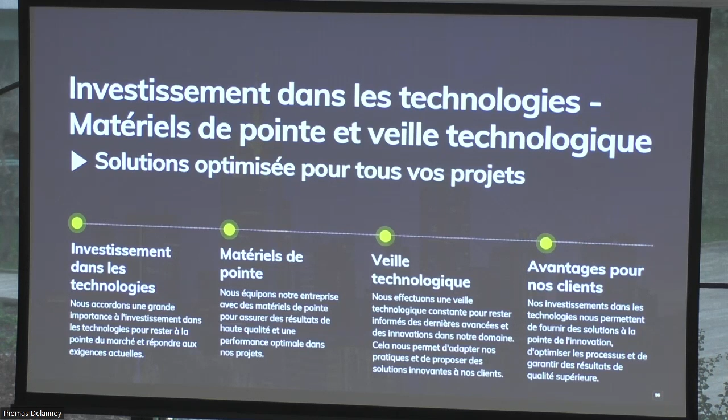Un point très essentiel de notre startup, c'est surtout l'investissement dans les nouvelles technologies. On sait qu'aujourd'hui le monde évolue, on a cette transition au numérique, cette transition au digital, et on a souvent des challenges pour travailler dans ce secteur. Ces challenges peuvent être de la résistance, des gens qui résistent au changement, ou parfois tout simplement le manque de compétences ou le manque de formation. Donc le but c'est vraiment d'avoir un matériel de pointe, des ressources et des compétences clés pour pouvoir résoudre les problématiques de notre marché actuel et surtout de se conformer à la veille technologique pour donner des solutions optimisées pour nos clients.

Alors l'industrie 4.0, ça ne se cache pas, aujourd'hui on y est, que ce soit avec l'automatisation ou la connectivité. On essaie plus ou moins d'automatiser les tâches pour gagner du temps, gagner en service et pouvoir partager nos données sur un cloud commun. Avec l'avancement technologique et l'apparition des IoT, Big Data, on va pouvoir gérer une quantité massive de données, sous plusieurs formes, pas seulement des données de construction mais aussi des modèles d'information variés. Et le problème aujourd'hui, c'est de pouvoir gérer toutes ces données et donner une intégration complète dans nos systèmes.

Quel est l'apport du géospatial dans tout ça? Le géospatial, c'est un mot qui est issu de la technologie de géomatique. C'est un mot grec, géo pour géographie, matique pour l'informatique. Alors notre travail repose principalement sur trois éléments essentiels.

Tout d'abord, on a la collecte de données, qui peut être aujourd'hui sous plusieurs formes: soit on choisit un modèle prêt de données à utiliser, soit c'est nous-mêmes qui créons la donnée. Je prends l'exemple en Tunisie, par exemple, contrairement en France. En France, on a toute la donnée, la quasi-totalité de données ouverte via des géoportails communaux. Donc pour travailler sur un projet de construction, on va tout simplement chercher cette donnée dans les géoportails, dans les plans existants, et par la suite faire évoluer notre travail vis-à-vis de ces données-là.

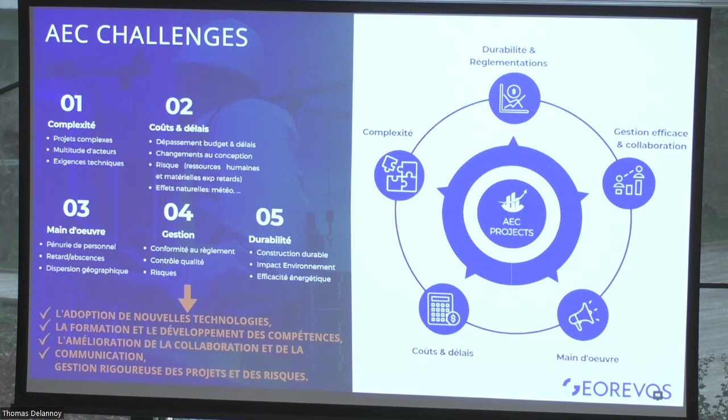Je reviens sur le terme construction 4.0 et l'apport des NTIC et du géospatial. NTIC, c'est les nouvelles technologies d'information et de communication. On entend parler du BIM, de réalité virtuelle, de l'analyse de données et d'intelligence artificielle surtout, de la capture de réalité avec le drone, le laser scan, les capteurs et l'IoT, et surtout de pouvoir faire le monitoring et la surveillance en temps réel de nos chantiers.

Toutes ces technologies, si elles sont bien choisies et bien adoptées dans le projet, vont nous permettre d'optimiser les ressources et surtout de réduire le coût et le temps de réalisation du projet. On va voir par la suite un exemple concret.

Effective management de projet, c'est-à-dire la gestion effective des projets : on va travailler tous ensemble dans le but de réduire les risques de projet, de fournir de meilleurs résultats, de meilleurs outputs, et d'optimiser le temps et le coût du projet.

On va utiliser toute cette palette de technologies, à savoir la réalité augmentée, l'utilisation des systèmes mobiles, parce qu'aujourd'hui le mobile est dans notre quotidien. Qui d'entre nous n'utilise pas son téléphone quasi toute la journée ? Donc nous proposons des solutions aussi simples à utiliser par téléphone portable.

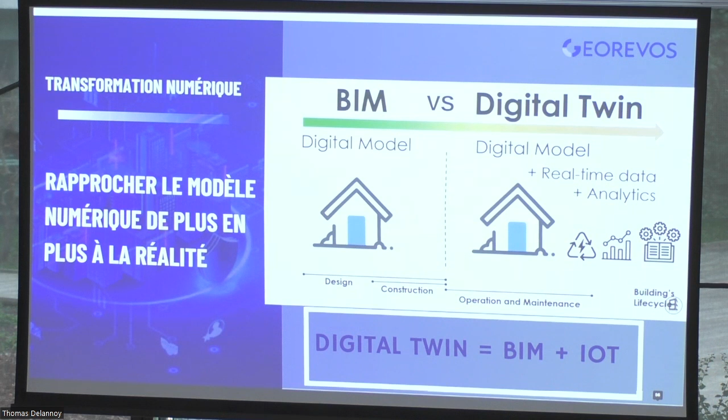Le BIM, ce n'est pas de la 3D, ce n'est pas un outil, ce n'est pas Revit, ce n'est pas ArchiCAD, c'est plutôt tout un process de gestion et de collaboration. On dit souvent que le BIM, c'est 3C : collaboration, communication et coordination. Le but, c'est toujours d'avoir un seul modèle via tous les intervenants, toutes les parties prenantes du projet, pouvoir se connecter tous ensemble, travailler tous ensemble sur le même projet, depuis la première phase qui est la conception jusqu'à sa construction, et par la suite l'exploitation et la maintenance.

Si on compare le CAD au BIM, on va dépenser plus de temps au début dans la conception, c'est-à-dire on va mettre de 50 à 80% du temps nécessaire pour le projet, pour définir des responsabilités, des objectifs clairs, qui fait quoi, à quel moment, qui est le responsable de tel rendu et quoi rentre à quel moment. Contrairement à ce que les gens aujourd'hui définissent ou adoptent : le BIM comme une simple 3D pour le visuel ou pour avoir un modèle joli qui présente une certaine réalité. Le BIM, c'est plus l'information qui est très importante dans notre modèle.

Les avantages qu'on va avoir par rapport au travail traditionnel, c'est tout d'abord le recours au CDE, le Common Data Environment, un serveur commun entre toutes les parties prenantes. Dans ce serveur, on va mettre toutes les informations sur le projet : non seulement le format natif, qui peut être n'importe quel format de logiciel, Revit, ArchiCAD ou autre, mais aussi des informations sur le bâtiment, des plans directeurs, des plans de maintenance et de gestion d'exploitation. Ça va éviter le double travail et surtout assurer la pérennité des données dans le temps.

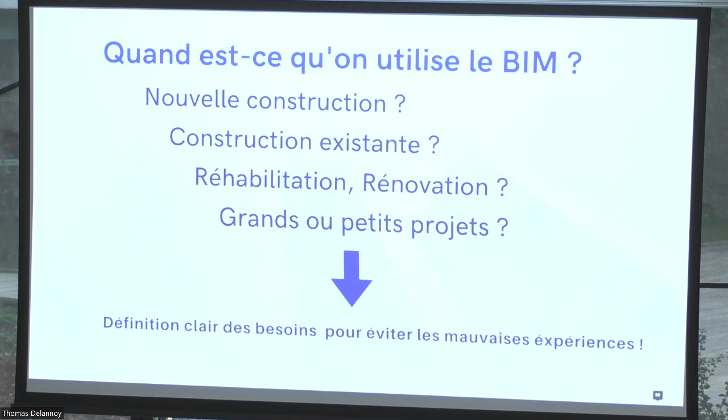Donc on entend souvent parler de LOD, LOI. Aujourd'hui, avec la nouvelle norme Building Smart Standards, we have LOIN. Donc tout ça, c'est des définitions. Mais ce qu'il faut garder dans la tête, qu'il y a deux choses. Il y a un niveau géométrique, c'est-à-dire un niveau de 3D qu'il faut créer. Mais de l'autre côté, il y a un niveau d'information demandé, le Level of Information Need.

Donc c'est le niveau d'information demandé dans le projet auquel il faut respecter, et il faut toujours se référer aux normes et aux standards de chaque pays. C'est-à-dire, si aujourd'hui j'ai un travail en France, je vais travailler avec les normes françaises. Et si j'ai un travail en Suisse, je ne peux pas quand même ramener la norme européenne ou seulement française pour régler le problème, parce que la norme en construction et en travaux publics, elle est différente d'un pays à un autre.

Dans le BIM, il y a plusieurs dimensions. On a parlé de 3D. Il faut savoir qu'au début, on va passer quand même par la 2D. Donc il y a ce qu'on appelle un niveau de maturité. Le niveau de maturité, il diffère d'un projet à un autre. Pour faire simple, aujourd'hui, on parle plus d'efficacité énergétique, on parle de zéro carbone, on parle de zéro déchet. Donc tout ça, c'est des nouvelles dimensions dans le BIM.

C'est le 8D, 9D, 10D, donc tout ce qui est lean management, manufacturing, safety, sécurité. Mais en France, on va voir par la suite les chiffres, on est plutôt dans la 5D, 6D. Donc on a su quand même passer la 3D, 4D, 5D pour aller dans la gestion, exploitation, maintenance.

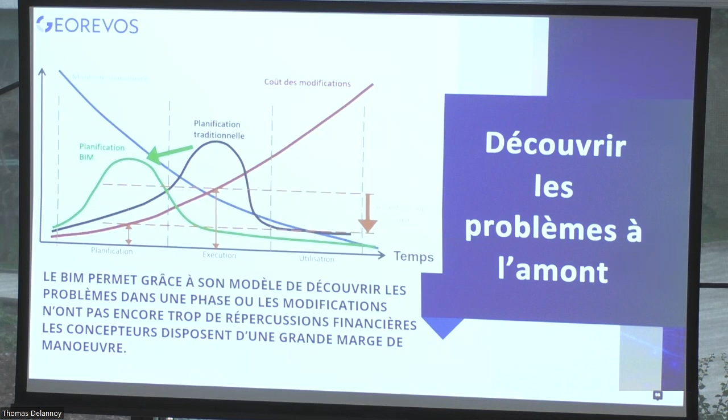On va regrouper tous les disciplinaires du métier, toutes les parties prenantes pour pouvoir gérer efficacement le projet. Et si on part dans une construction, ça peut être architectes, CVC, structure, infrastructure, mais on sait tous qu'il y a plein d'autres intervenants dans le marché.

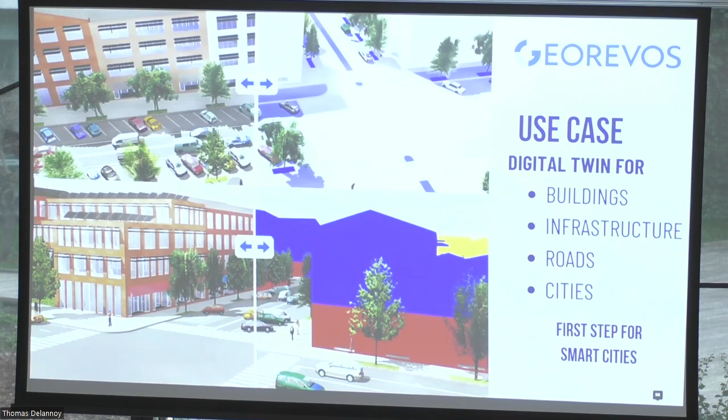Use case, donc le digital twin, on l'utilise quasi partout, comme on l'a vu dans la vidéo, que ce soit pour les bâtiments, l'infrastructure, les routes et les cités. Et l'un des services qu'on propose, c'est vraiment la capture de réalité qui va nous permettre d'avoir un point de départ, d'avoir une idée en 3D, en nuage de points. C'est ce qu'on appelle le produit de capture de réalité de l'environnement, pour pouvoir transformer par la suite ces nuages de points en modèles 3D, qui peuvent être tout simplement un modèle 3D du bâtiment ou un modèle 3D urbain.

La plupart des gens me posent la question : est-ce qu'on utilise ces outils seulement dans la partie de réhabilitation, par exemple des bâtiments, la rénovation des bâtiments, ou bien peut-on quand même utiliser cette technologie dans l'exécution de projets ou voire à l'avant-projet ? La réponse, c'est qu'on utilise cette technologie dans toutes les phases de projet. Il est possible de l'utiliser dans toutes les phases.

Je prends l'exemple de la partie exécution : on doit quand même s'assurer que l'exécution est faite conformément au plan d'architecture, au plan de génie civil. C'est bien d'avoir un modèle BIM, mais il faut quand même le contrôler sur le terrain par la suite. On ne sait pas toujours qui va construire, donc c'est vrai qu'on a une certaine confiance, mais si on veut faire les choses correctement, on devrait faire un contrôle quotidien sur tout ce qui est construit. C'est ça le but de la capture de réalité. Il y a bien évidemment plusieurs utilisations.

Par exemple, je prends le cas du patrimoine, pour conserver un patrimoine donné, pour faire la réhabilitation et autres. Je ne vais pas perdre plus de temps sur ça.

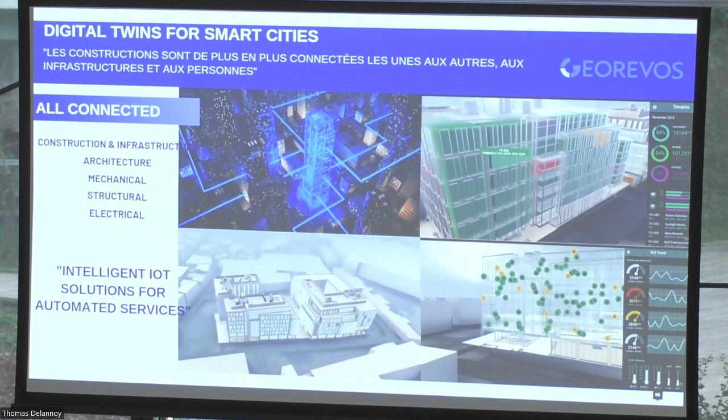Il y a certains pays qui ont adopté à l'avance le Digital Twin. Je prends l'exemple de l'Islande, l'exemple de Singapour, qui ont aujourd'hui une plateforme en ligne. Vous pouvez aller vérifier si vous êtes intéressé, qui propose un Digital Twin complet du pays. Donc ça, c'est aussi un but qu'on réfléchit, qu'on essaie d'accompagner déjà nos entreprises dans le développement de leur propre plateforme qui propose des 3D de leurs projets avec une répartition ou dispersion spatiale complète sur le monde.

Par exemple, aujourd'hui, on travaille avec des clients au Canada, des clients en France, des clients en Suisse, voire des clients en Afrique. Et le but, c'est de fournir une idée globale sur l'avancement de leurs projets, sur l'évolution de leurs projets via des plateformes qui sont anonymes et des plateformes qui sont partagées avec eux.

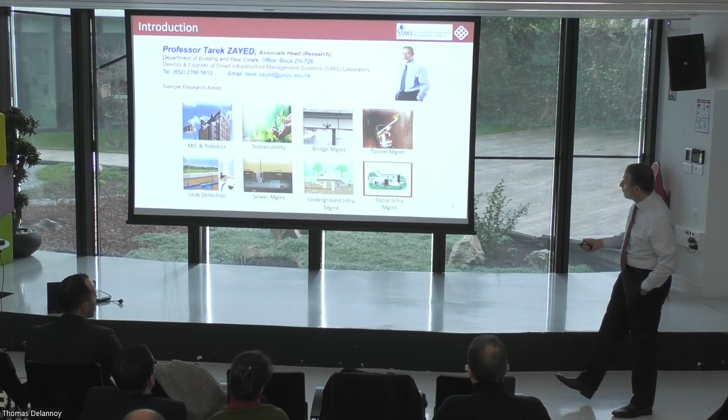I'll show you something. All these are gates we can open, and you'll find a lot of work under each one — bridge management, tunnel management as well, inspection using different technologies, leak detection for water leaks, which is also a big problem worldwide. We have a lot of modeling and decision-making tools for leak detection, sewer management, and even water networks. We did a lot of work on water networks in terms of assessing condition, deterioration, replacement decisions, risk assessment. If you have a question, we can open any of these gates and discuss what we've done — sewer management, sewer networks, underground infrastructure management systems for the three municipal water networks: water, sewer, roads.

So we have also some people working on the roads as well. And then social infrastructure, which I call social infrastructure, for schools, hospitals, and big structures that are available among us. These are the things. So we're gonna only focus today on what we are doing in MIC and robotics. Those are the 5 areas.

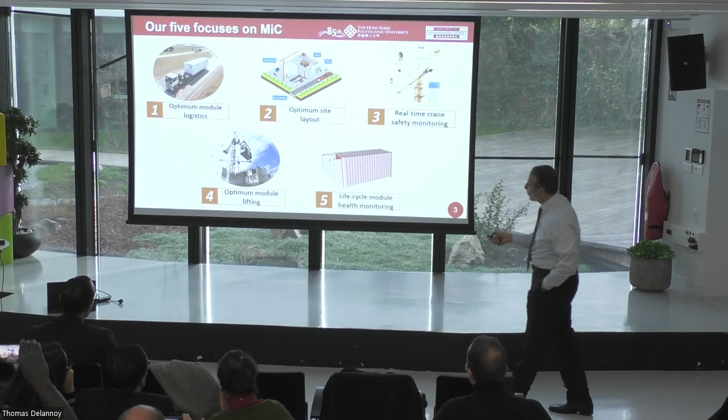So now, the first point which I would like to point out, and what I'm gonna do today, is just highlight things, because there's a lot to speak about in each one of them.

So we're gonna talk about logistics for modular construction. Modular construction, particularly in Hong Kong, involves high-rise buildings, concrete or steel. You find 60 stories, which is different from US and Canada, where you have multiple stories, like 2-3 stories, maximum maybe 10 stories in concrete. Those need special designs for connections and for concrete and steel structures. And how can you do that actually in Hong Kong? Because Hong Kong is a very small area where the roads are very narrow as well, and the lanes are smaller than usual. So trucks, how can trucks move? And how can you do all the logistics? It's very important.

So we developed something for logistics. Also, if we have a project and we need more than 1 tower crane, or just 1 tower crane, where could we locate or allocate the tower crane in order to achieve minimum time, minimum cost, maximum safety, and also achieve all the project objectives? So this is how we look at it. We also looked at optimum site layout location for the tower crane.

And we also developed, for the crane itself, some safety issues which we have to look at. So how can we have a safe tower crane work? We looked at many technologies, and we are working on developing right now a real-time crane safety monitoring system, which will be very good. And we are approaching automation. Professor Hatch actually was ahead of us on this issue. We're working on the tower crane. We are coming also to help on this domain.

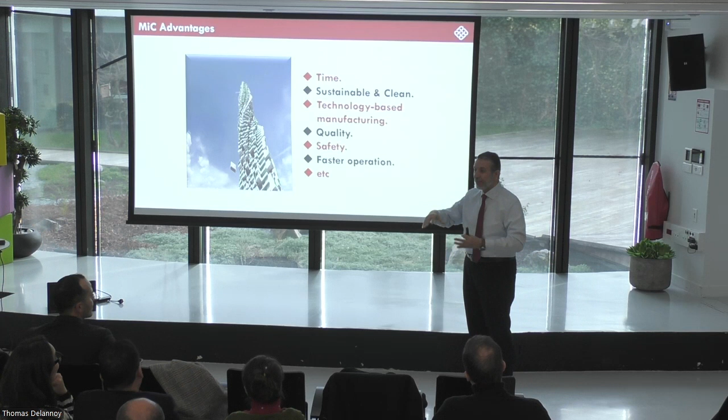However, right now with modular construction, we are going to mimic manufacturing, where we have a factory to produce modules, and then we carry these modules using trucks to the location. Dr. Mohamed Al-Hussein did a 10-story building in New York in 1 week - am I right? Or less than that, maybe, or five buildings, 3 stories. So it will be very fast, but the preparation before that is different. Procurement methods will be totally different, and you have to look at different trades and different contracting techniques. But anyway, it saves time for sure, and we have a lot of statistics about this. It saves.

In terms of cost, it's not totally known that it saves a lot of cost, but in some projects it saves some cost. It is also safe, sustainable, and high quality, because you do that in the factory, it will be a very good environment. In winter, all these kinds of things will not impact much. So it is a bit better and faster operation. It has a lot of advantages for modular construction. I know that all of you know all these kinds of things, so I'm not going to stop much over here.

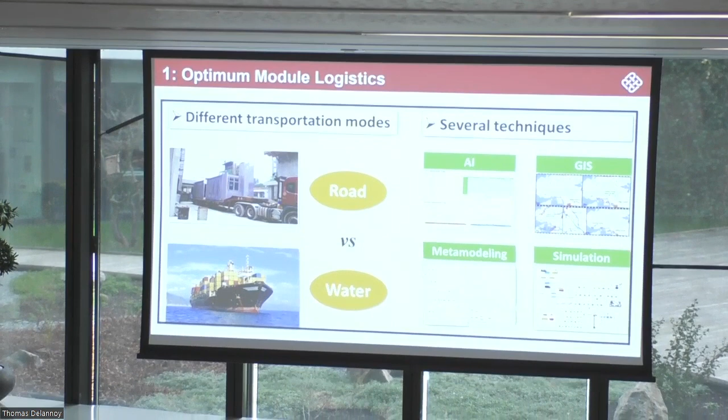I will start with the first one, where we talk about optimum logistics. So what we've done, we looked at the different types of logistics where you can transport all the modules, as you can see on the truck, using trucks, roads, or using sea or ships, where you can put all the modules on a ship, and this will be cheaper, but might not be that fast. But this has to be planned very well in advance. So we developed, based on both of them, using AI technology, GIS, and simulations and some other modeling techniques, how we can make this logistics optimum with minimum cost, minimum time, and safety and sustainability as well. We take sustainability into account, so we took all of them into account.

So how we looked at this, I'm going to show you just two case studies in Hong Kong. Those are our 17th floor buildings, each one of them, and each one will use two tower cranes. One of them will have some temporary storage. In Hong Kong, everything is very congested, very small, so to have a temporary storage area is a privilege, not available to everybody. Some of them will be just in time, so you have to deliver the module at the time that you need it. This is impossible actually in construction to a great extent, but this is what they try to do. For those two case studies we looked at, we developed some key performance indicators for the different operations.

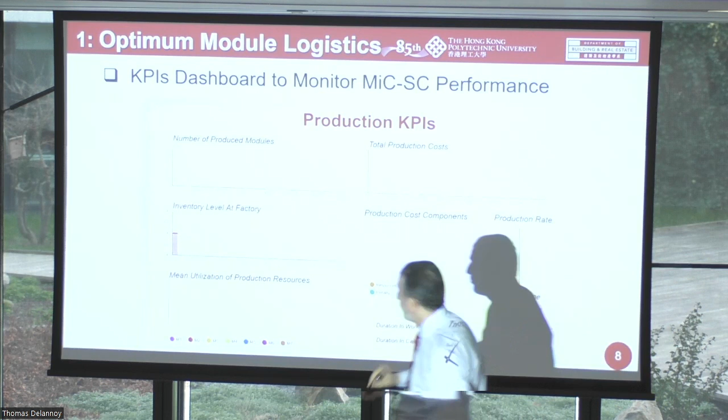For example, production in the construction site. Check it. Oh, this is supposed to be a video. How can we make this work? This one. Yeah. Oh, it has to be like that. Oh, okay, so this shows you actually these are some... oh, it doesn't work. It's supposed to work like this. Some of the features do not work on it, depends on the... oh, okay.

Leave it this way. So these are some key performance indicators for production during the factory phase. So you have several indicators for you as a decision maker to know, and it shows you the time, the inventory, all these kinds of things. I'm not going to stop much here because of time limitation.

Same thing for logistics. We looked at logistics, we looked at its cost, the transportation, and also... so you can see it in front of you, per day, per hour, per whatever you decide on. So these are all simulations.

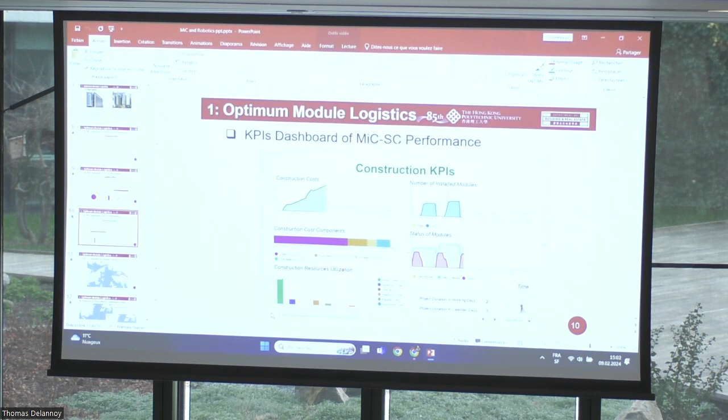Construction, same thing. So you can have the cost, the components, you can select what type of KPIs you need, and then you can have it for the decision maker. And this is also based on GIS. It will show you in real time where the trucks are, and which type of truck or which number, and how you can follow up with what's going on.

So the second point that I would like to talk about here is the optimal site layout location for the tower crane.

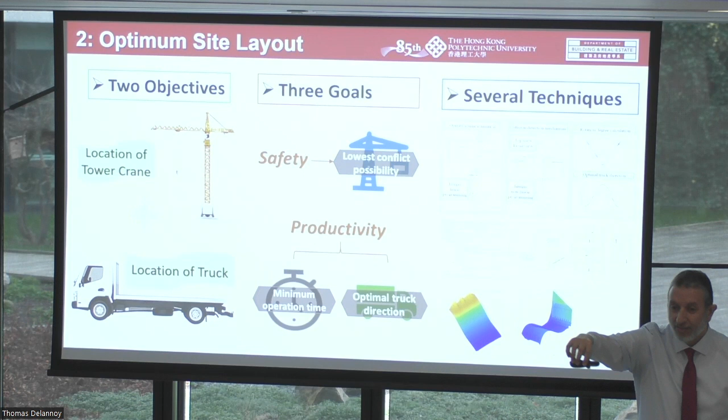What we took into account was two main objectives: where is the location of the tower crane, and where is the location of the truck. Not only the location of the truck, but the direction of the truck. Because when you carry the module like this, you don't want it to swing in the air, and you'd like to reduce the amount of turning, because when you align the module you need people on the ground to help. So we wanted to reduce the number of people on the ground, and we did research on that.

Also three main goals: maximize safety, maximize productivity with minimum time, and optimal direction of trucks. This is actually supported by many models.

You can see the objective actually achieved less collision, a percentage of 80% better than the original selection done by the contractor. The operation time also decreased by 38% with our model compared to the contractor's model. And the rotation of the modules, because of the truck direction, alignment, or orientation, also saved 26%. So this was actually very good.

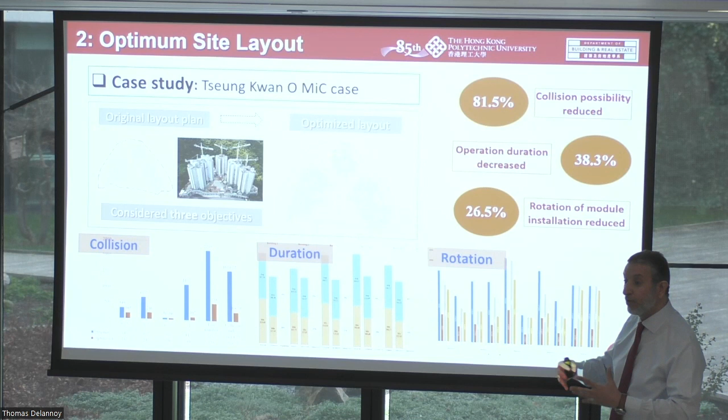These are models that we developed, and we are now in the process of adding artificial intelligence to make it more generative, so it can be more attractive and used by the industry.

This is how it applies to different locations for different buildings and answers the questions. This was actually awarded prizes across Hong Kong and China. It was second place in Hong Kong and also across big China, among most of the universities' innovations, and took a lot of prizes.

We are in the process of developing an AI IoT integrated tool to make the operation very safe for the operator. Until now we are trying to help the operator while he or she is in the cabin on the tower crane. But after a while, we'll bring them down with semi-automation, and afterwards it will be fully autonomous. This is what we are working on right now.

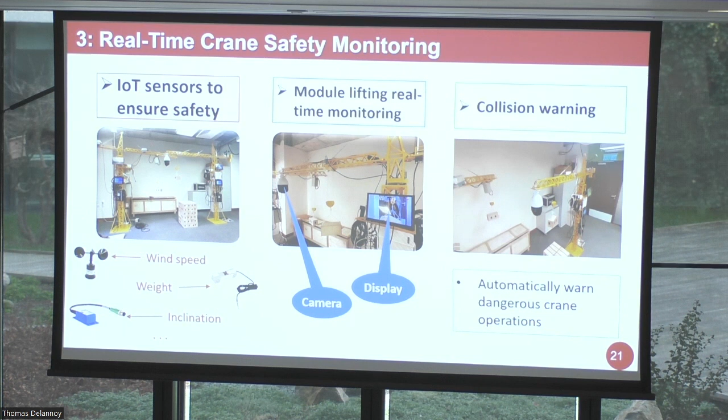Now, auto module lifting—I'm going to go fast on this because there are a lot of simulations on how we can optimize the cycle time of the crane carrying non-stationary modules. We did a lot of work on this, taking into account wind load, different wind speeds, weather conditions, climate conditions, and many other aspects related to the operator as well.

This is another video for computer vision, but I don't want to play the video right now because it will take some time. We use computer vision to check the alignment. I also have another PhD student working on developing models and technology to make this alignment easier, faster, and more precise, with fewer people on the ground in order to save money.

This is also the automation, or semi-automation, for the tower crane. Let me show whether this video will work or not.

So this was the reality and also the controlling. This is working autonomous for now on the simulation. We developed all the control algorithms to control the load without any collision and with respecting all the obstacles on the ground and any blind areas that the person can't see. After a while, we're going to implement this to the tower cranes that we have.

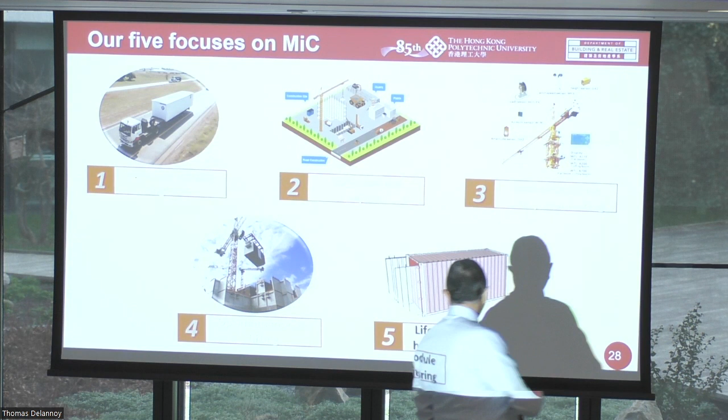These sensors we built in-house. We built around 100 of them right now. We are just in the process of applying them to a real project. We tried them in the lab and they're working fine. We're now in the process of making this prototype available for the market.

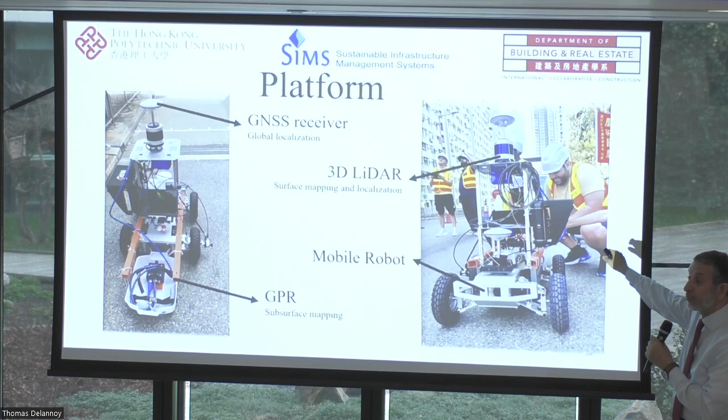It has a GNSS, two LiDAR systems, a 360 camera, and a depth camera. We're planning to put infrared thermography and some other technologies on this GPR robot, in order for the robot to inspect bridges without us interfering. This will be faster and safer.

We did this in a bridge in Hong Kong. Let me show you how it is autonomous right now. We developed it to work fully autonomous. I showed it to Professor Labhaj, he's actually seen the robot.

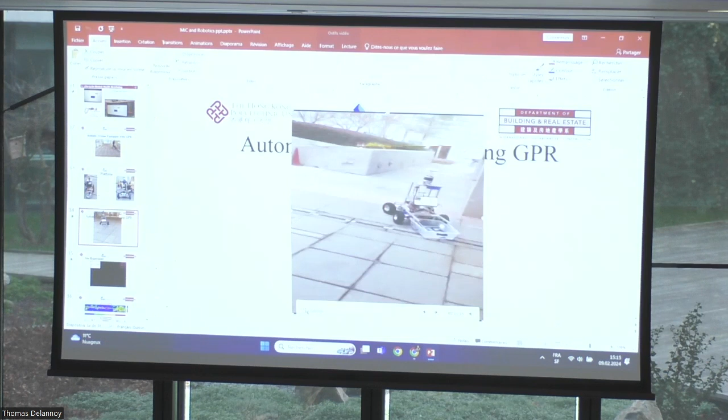This works autonomous right now, whereas before the dog was working with a remote. This is working autonomous without a remote. It can see the places, any obstacle, and then maneuver and adjust, as you can see. It carries a GPR and collects the information, and uses LiDAR to develop the 3D model.

So I'm sorry for interfering with your work. Okay.

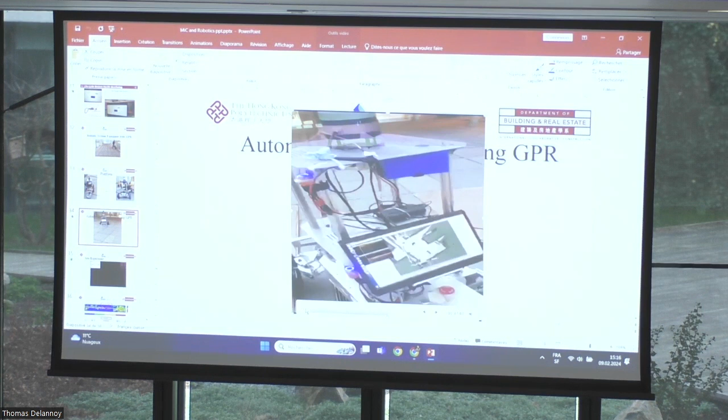So yes, complimenting us. We use the LiDAR to develop the 3D environment, and then afterwards we work our work over there.

Yeah, it was our pleasure, yes. Okay.

So this robot is ready right now. We are going to try it maybe in a week or two in a project in Hong Kong. Okay, we have used this.

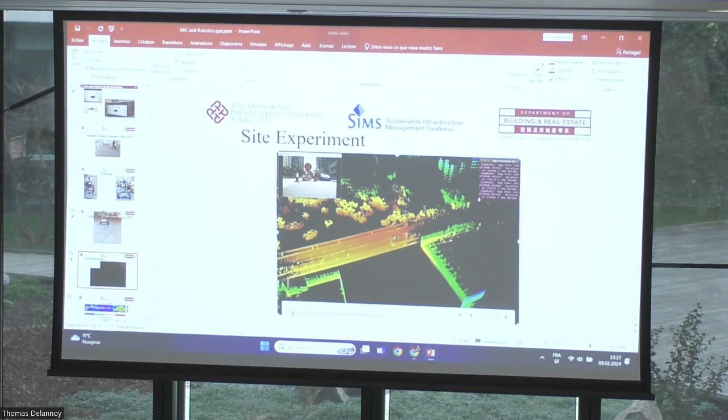On a bridge, as you can see, the robot was running beside the cones and building the 3D environment before making the inspection. It goes one time to build the 3D environment in order for us to identify whenever we have a problem, where it is located, to make some reference. So it builds a 3D environment, as you can see here it is built. Then afterwards we can go ahead and do the inspection.

This bridge was - the Quebec government was trying to demolish the bridge. And then we took it as a test bed. Then we scanned it a couple of times before demolishment, and then we scanned it after new construction, and we compared in order to test our method. Then the method was perfect.

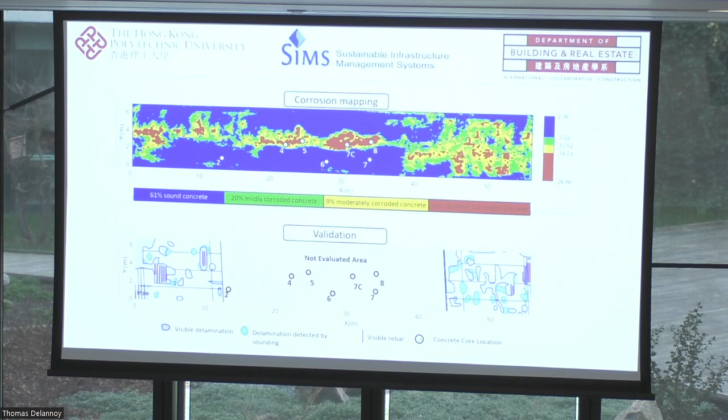With that, I would like to conclude that we developed some areas related to Industry 4.0 or Construction 3.0 or 4.0 as well. These areas are automating decision-making tools, in order for the decision maker to make it faster, precise, and economic. This is what we've done in all of the 5 areas that I would like to present today. But I will be happy to answer any of your questions on others as well.

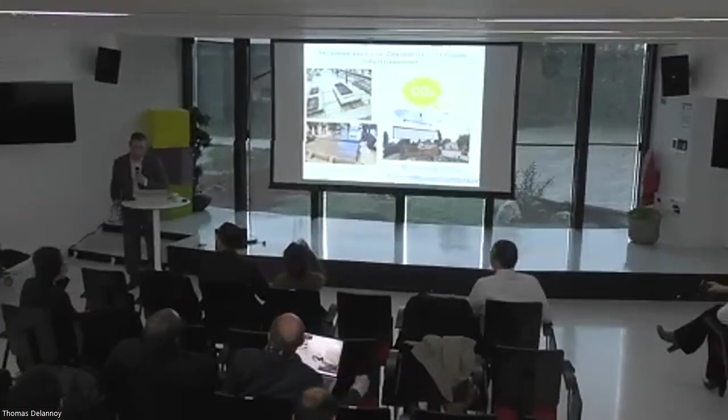I am a professor at the University of Alberta, but I know one thing in my life: I do nothing but modular or off-site construction, so nothing else, that's all I know. There is something called CO2 in my title here, which is how I can contribute — construction has the potential of contributing to CO2, which is environmentally unfriendly when you look at it. But I'll present to you probably two things today.

One is a product, which is precast concrete. So I started to look at concrete and compare it with steel. I put in front of you here the I-beam. The I-beam is an efficient design — we put the material where it's needed. So if I need a flange to carry some load, or I need the web to carry a different load, there is not much waste if you look at the design of the precast steel element.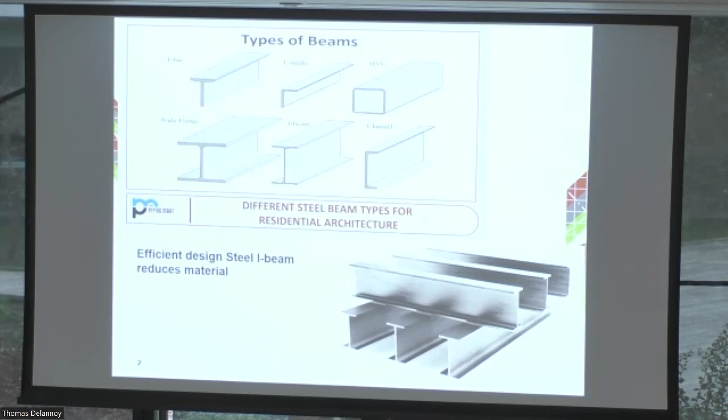Now the concrete industry started to learn the same thing. Well, if steel works this way, we start building bridges the same way — we call it the University of Nebraska Bridge. That bridge, if you look at it, is really elegant and design-wise does not use a lot of concrete, because the concrete in the middle is really just filler, it doesn't do anything. You need the concrete where your rebar is, because they can work together as a member.

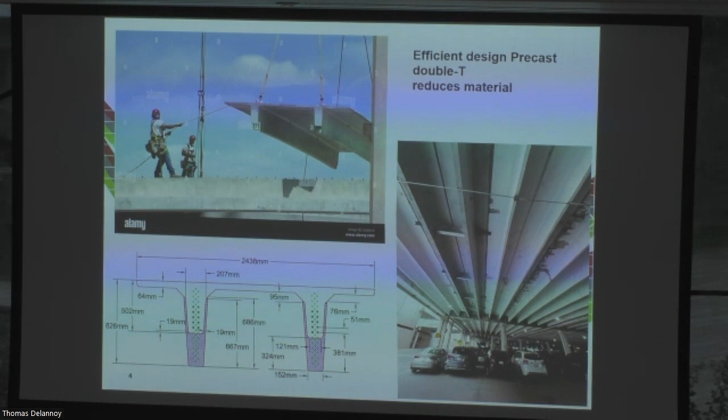And then the industry started to think otherwise — okay, well, we have what they call the double T. If you want a good span, you put your rebar in a location, and then the rest of the concrete in the middle is really wasted. It's just waste, there's no need and it doesn't do anything. What the concrete does is work around the rebar, around that structure.

So having that in mind, I started to look at how we build. When I look at a slab of a high-rise building, we design it to withstand some of the forces, which is deflection, bending, and other forces. Based on that, we determine what type of concrete we need and what type of reinforcement to carry the load needed — reinforcement means the steel or rebar in the structure. So the rebar is put at the bottom with enough height, a distance between the rebar and the neutral axis, so it can carry the load, and then it's surrounded with concrete to carry the structure.

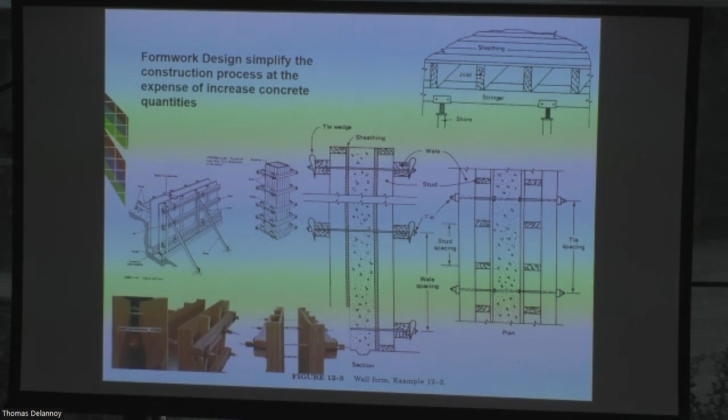But compared to steel, we fill it all with concrete because of simplicity. Forming is very expensive for concrete, so form work costs a lot of money and creates a lot of waste. So for simplicity, we just put up forming and pour concrete everywhere, because we don't really care as much in reality.

And if you look at the concrete structure, the cost, the material, and the waste is a substantial amount that goes outside of the concrete itself, into forming and other systems.

In addition, the slab is designed to carry the load of the people, but it's also designed to take advantage of putting the mechanical and electrical systems underneath. So once you have the slab, we suspend the ceiling and add mechanical systems, hanging them in the floor.

So the industry said, okay, we can reduce the concrete, and came up with a system called the waffle system. It's similar to a Belgian waffle, but it's a waffle system. Again, it did dramatically reduce the concrete because the wasted concrete was taken away.

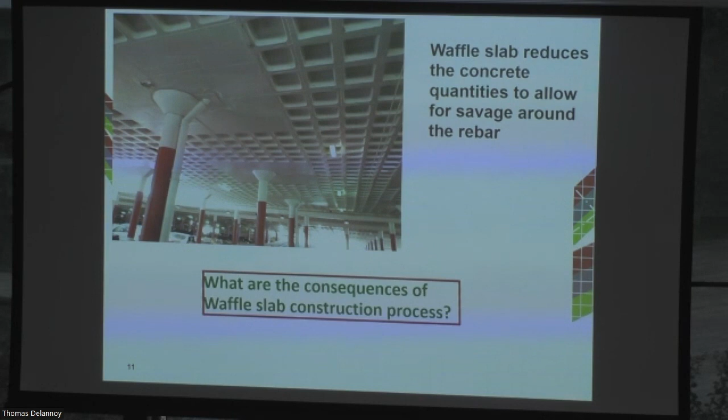The waffle concrete has a challenge because it's not easy to make - you have to build a forming system, and it's not cheap, it's expensive and takes a lot of time. In addition, the waffle system did not solve the issue with the mechanical structure.

So if you look at these - by the way, I met two girls from Brazil, so these photos are from Sao Paulo - you get the waffle system, and then you have to put your mechanical system underneath that. So it did help some, but not all of what I wanted the concrete to do.

We're all familiar with the sandwich panel for walls. The sandwich panel was created probably 90 to 100 years ago - concrete, a layer of insulation, layer of concrete. The whole industry talked about fixing it, making it more efficient, but we never thought to interrogate the product itself and ask if this is the right way to do it.

So it becomes very expensive when it comes to having machines. To build a factory using the sandwich panel, you may have to consider 20, 30, or 50 million dollars or euros to have a really good, decent factory. Everybody was looking around for how to make that efficient, forgetting about the product itself and whether it's the right product to use.

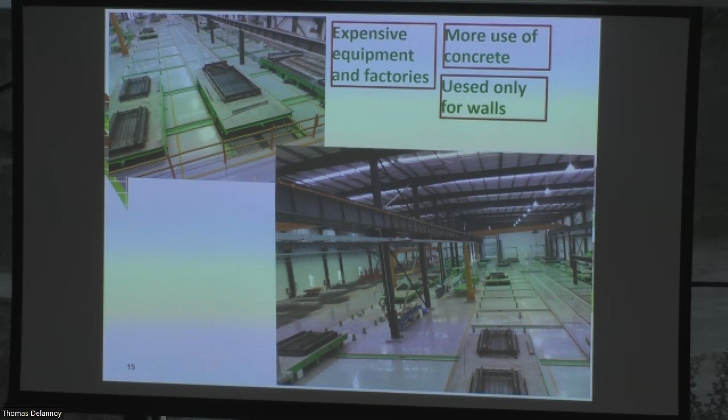If you look at the double-T system, the I-beam as used in steel, I was inspired by that, and I created something - I built my own system, which is a rib structure. So I'll show you that system.

The rib structure is really inspired by wood. In Canada, we build lots of wood structures, using what they call studs in the walls and sheathing from outside, and you build the house 2, 3, 4 stories - now we allow 5-story buildings. You get kids dancing in the house and pianos sitting in there. It's a very elegant design.

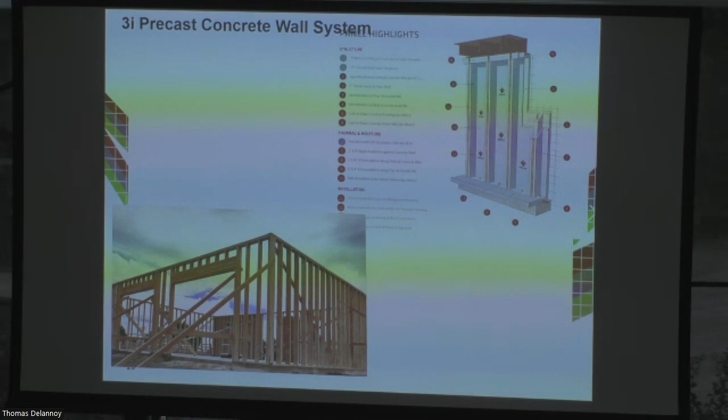So I got inspired by the wood and designed a system which is all concrete rather than wood, which I call 3I. 3I means intelligent, integrated, and a little bit more of the I's.

So now, the forming system is expensive - concrete has a challenge because the forming system is expensive. So I use styrofoam; I built a machine to cut the form the way I want it.

The second challenge I discovered is the concrete itself. With regular concrete, you have to compact it, vibrate it to get it between the ribs - I call them ribs - which are tiny. So it took a long time.

So I used what they call SCC, self-consolidating or self-leveling concrete. A little bit more expensive, but with these panels my target is now 10 minutes - it used to take about 2 hours to pour a table like this. Now my target is 10 minutes.

So I'm starting to target 10 minutes or less. I have 2 people, except for the concrete, I need 4. So 10 minutes for the forming, 10 minutes for the styrofoam, 10 minutes on takt time.

So I can build these panels in 10-minute cycles because of the system I created, which is the styrofoam, and also the type of concrete I use. These things give me an opportunity to add value to the wall. So I can put stamping, give it the color the customer wants, and the type of finishing the customer wants at almost very minimal cost.

So if you can see these panels, I started with basements in Canada and then moved up to building residential buildings. And I made a commitment to build the buildings at the cost of wood. Wood is very cheap in Canada, so I'm building at the same cost as wood construction.

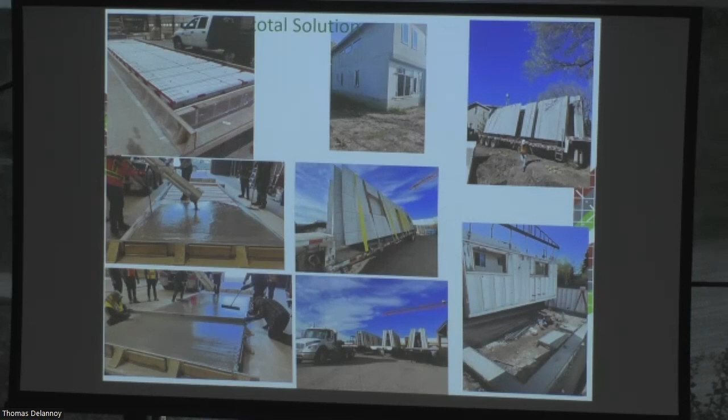In Canada, we focus a lot on insulation because of the cold in winter. So if you look at the system, all that is concrete. Here we go - this is my concrete, which is 5 centimeters. And these are the structures that carry the load, which become multiple beams or multi-joists if you want to look at it. And then this is the styrofoam that covers the entire structure.

And then the customers can add more insulation as they go. So it's a very simple system, and the simplicity of that is in the way I build it in the factory. The other benefit is I can create a full span - economically I can do a span of about 25 to 30 feet, which is about 8 to 9 meters, without having to have a middle support.

And also, if you look at the rib structure, this is where I can put the mechanical system. So in my mechanical system now, I hide it between the ribs I have.

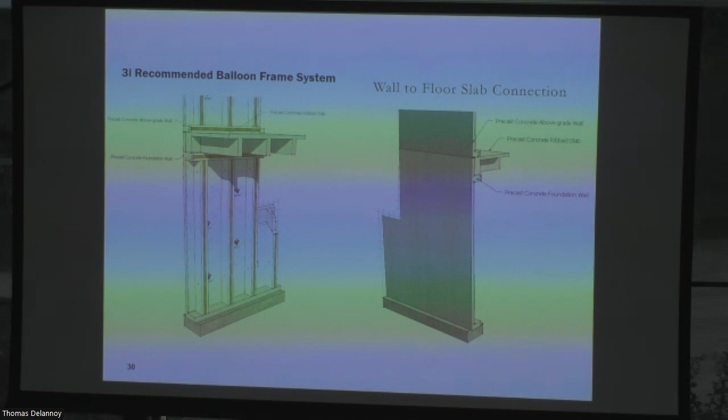The challenge I face with thermal bridging in Canada is a very big issue, because when it's cold outside, that cold can propagate through the concrete. So we came up with a good system - I implemented it, though I've yet to patent it. I recess the top plate of the wall by the thickness of the floor, and then I have continuous insulation. We have two systems: we call it a balloon structure, where your insulation is continuous, or a platform structure. So I use almost a mimic of a balloon structure in my system. If you can see the connection between walls and floors, there are insulations and thermal bridging breaks throughout the entire process.

I also come up with ideas - once you're in the factory, you start innovating. Innovation about a door or window: whenever you have a door or window, I create a beam above and a beam below it. My window is 100% structurally solid, in a way that even if the house moves, the window will never crack. We tend to see cracks in windows if it's not properly done, because of movement and motion. That's basically what it's showing you here.

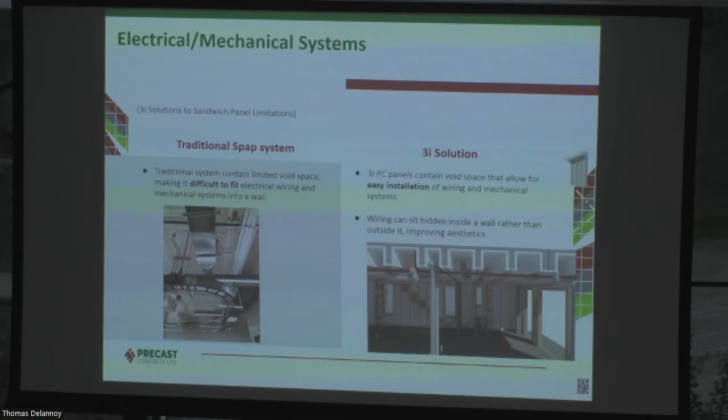So the mechanical system, instead of using up space, is housed between the ribs - almost 70 or 80% of it. Unlike hollow core or other systems, this really provides room, while giving the same structure. Even the structure I have for the walls I built is probably 4 or 5 times stronger.

And the reason I have to add more is because I have to tilt it and ship it. So my basic design needs very little reinforcement, but because of tilting, lifting, and moving, I have to add way more reinforcement. So the concrete I use reaches very high strength. In Canada, we average about 32 MPa after 28 days. My concrete reaches 50 to 60, even 70 MPa in 7 days, and then the concrete continues to mature as you go.

So these are some of the houses we started building, and unlike the waffle system and others, it really accomplishes multiple things: reducing the concrete, providing simplicity, and saving space that would otherwise be taken up in the house or building.

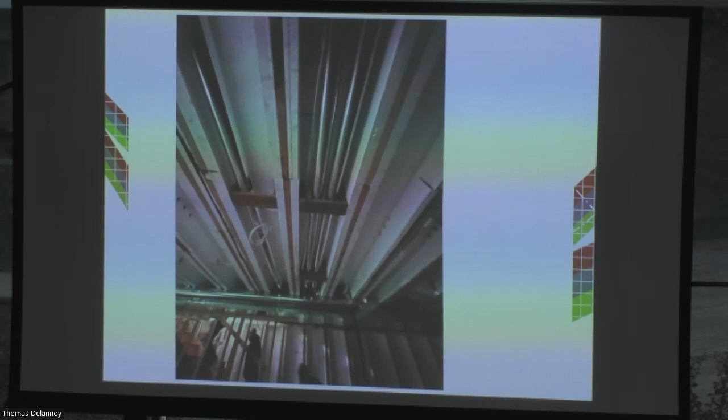So these are, you can see here, the mechanical system. In Canada, we use forced air to heat, and that forced air required a larger ducting system. If you come to the basements in Canada, you can see duct everywhere. So this way I can put it elegantly and use the space and so on.

So that's the system, you ship it, and I am able to ship. The panel has, I can call it ductility, although concrete doesn't allow ductility, but because of the structure the way it is, it did work well for me. So I'm shipping those 100, 1,000, or 2,000 kilometers away from where the factory is, and it's worked very well.

And you can see here this panel is stamped based on the requirement of the customer. So they sent me what they want, and I have an artist from town, and the artist reverses what the client wants. We create a stamp, and we can apply that stamp on top. So any architect can come up with an idea, and that's what we do for the customers as we go.

There is a system done here in Spain, but they make it volumetric. So the Spanish company, they put the rib from the outside, and they build lots in France as well. They have lots of projects in France, but based on the modular, on the system, which is volumetric rather than 2D. I do only panels.

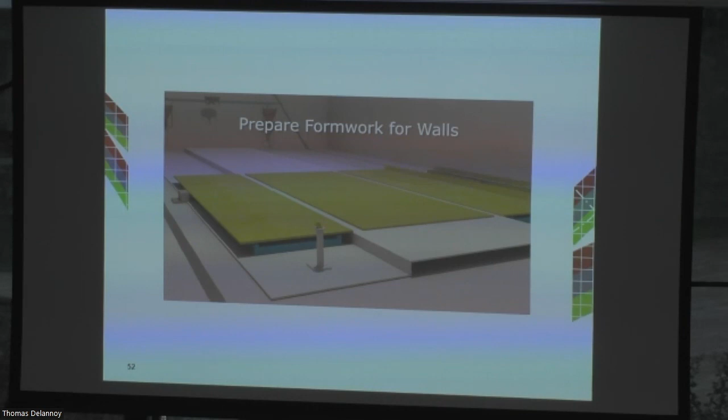So this is the type of project. But they patented the way they build it. So they patented that in a way that to make it volumetric, because people worry when it comes to precast about the connections and the joints.

So the joints, you need to really master that properly. Connection can be engineered, which is easy to do, everybody can do that. But the joints, you have to rely on the workmanship. So they pour the concrete in the walls, and they flip the walls, and then pour concrete in the floor, and it becomes one volumetric, monolithic structure. So this technology is patented by this company in Spain.

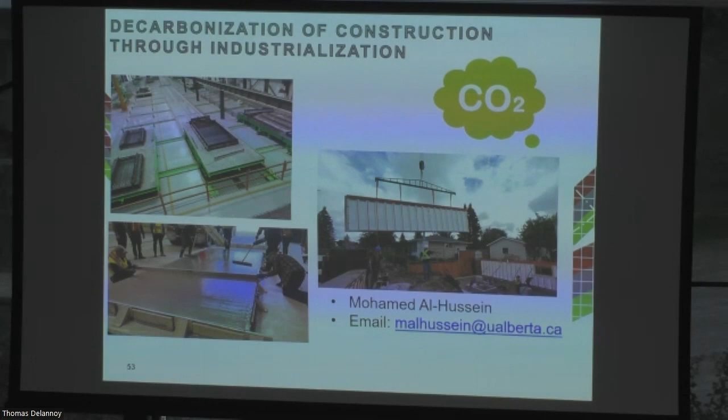I'll start with, so the sound, I don't know what happened, so the sound is not there. So it tells you, I'll show you here a project which Professor Zayed mentioned. I was asked to build 5 student dormitories in the US, and they wanted to build 5 in one summer. So they gave me to build 3 in one summer, and they gave me 3 weeks for the 3 buildings.

When I visited the site, I noticed there is a place I can put the roof. The key was the roof. So I ended up really building 5 of these buildings, which is 3-story each, in 10 days, because these modules came ready from Pennsylvania to Penn State, and it was done really efficiently. After me, the general contractor finished the project before the end of the summer. So we started in May when the school is over, and by the time the students came back, 5 buildings were up for them.

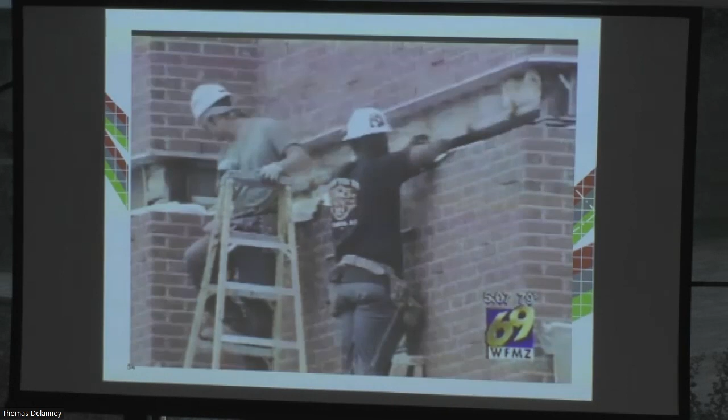So this is how the modules came, and this was a little bit of a challenge because it's an old town in Pennsylvania. The entire town is brick, every house is brick, and they wanted to have the same style. So the university sent us the architect and a few people to see. We built several walls to show them, and they chose the pattern. So the bricks were built in the factory.

So those modules were shipped with almost complete air conditioning installed. Flooring is installed, except the connection between the modules, which they have to do afterwards.

The key, if you look at the presentations today, Ismail, about the modules and the information. So if you front-load the model, I know Dr. Zayed mentioned about the logistics on site. So a couple of things when it comes to installing modules: the schedule is no longer in days, because in construction we're familiar with days.

We schedule everything in days and weeks. Here, my schedule is in minutes. So if you look at the calculations, every task here takes seconds and minutes. And then I have to locate the people in locations so that when I want them, I find them. So everybody will do 5 minutes or 2 minutes of work and then wait another 10 or 15 minutes, doing nothing. The problem is they start wandering around and multitasking, talking about what they want to do on the weekend and so on. When I want them, I can't find them.

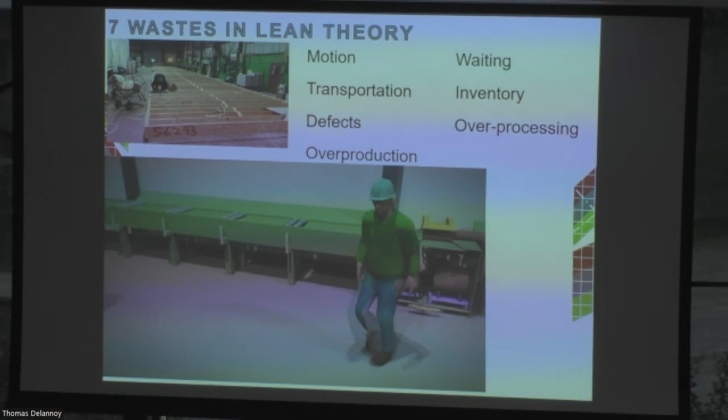So if I take you back to the factory itself, in North America, this is for the wood industry. They do a lot of conventional work under the roof, like that machine you see here. They make the rim board of the house out of smaller pieces, 2.5 meters long, and join them together to make 15 or 20 meter lengths. That machine has been in that factory for about 45 or 50 years, but it's still doing the job.

When they put it together, you can imagine how much time is wasted. So what I put together for you are principles of lean - I know there's a lot of discussion about lean. Motion, transportation, defects, overproduction, waiting - it's all violated, and they violate that every single day.

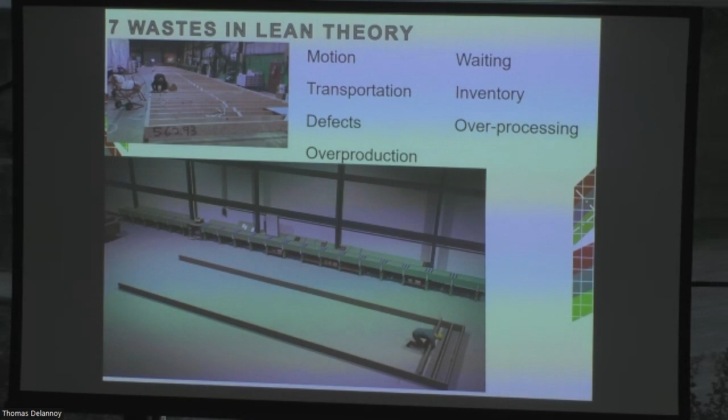So this person, or a few people, have to go pick up material back and forth all the time. When they're done with that, they have to fasten these two together, so somebody comes with the nail gun - you can see that guy walking. I made that animation because as a university professor, we're not allowed to take videos and photos, they don't allow us to do that. So we had to translate that into a visual system, where this guy moves up and down. But there is a good thing about it - he doesn't need to pay a gym membership fee, because he's exercising every day.

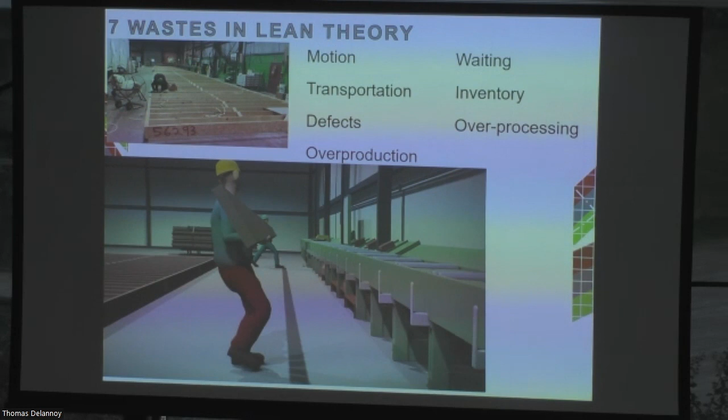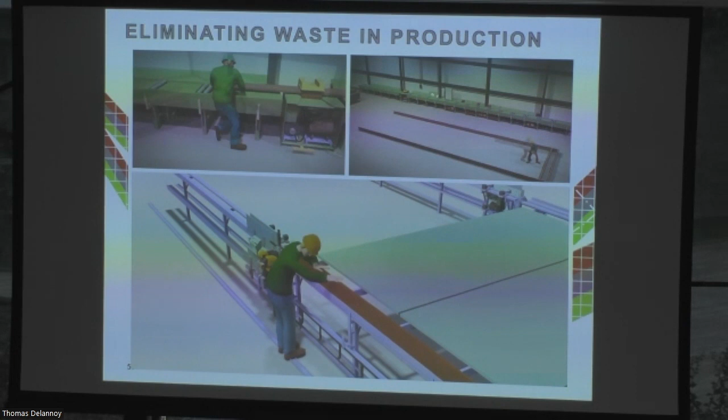So I looked at it and said, okay, let's fragment it into smaller pieces. What can I do to help this industry change the way they do things without having to invest in technology? I moved the machine, the one you see from the top left, to where he needs it. This company told me they saved 4,200 hours per year just from moving that machine from where it was to where it was supposed to be. It's as simple as that. Now nobody's moving back to pick up material, and we position things in front of the operator so they don't have to travel back and forth for all these pieces.

When it comes to the joist, I use gravity to the advantage - I can load those on top and just lower it down, then go to work. We counted the work at 2,000 steps on average per floor. Now all these steps are like just standing in one location with no automation - if you look at that, very, very little automation.

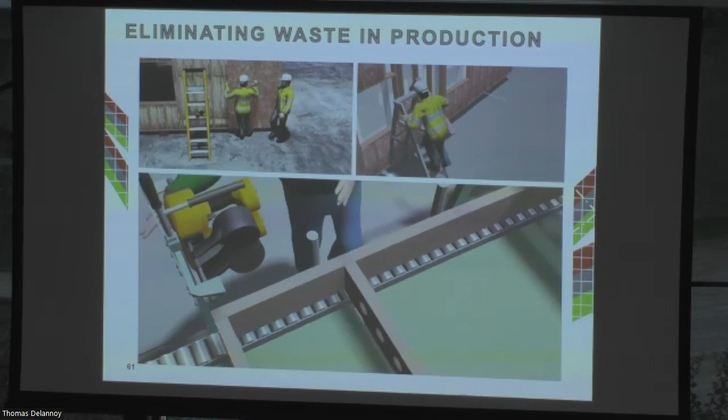We started to push hard for some in-advance work. If you look at these joists, they're pre-drilled in advance rather than drilling on location. You can see the top part, people move up and down. You can really co-locate the material to be in a comfortable place where the workers can reach out and put it together. With very little technology, you can remove the physical demand on the human. So instead of you climbing up and down all day, you can take a little bit of advantage of the technology to help you do some of the work.

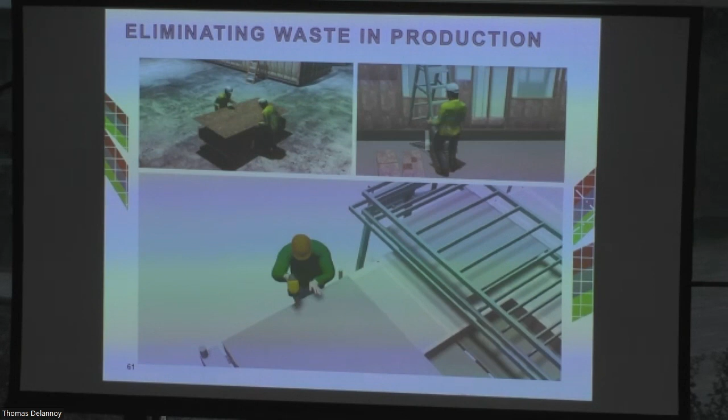And installing drywalls and the rest of it - this could go on until the operations are finished. The concept I push hard in this industry is two things: fix the people, fix the tools, and let the product come. So as a manager, your job is to bring the product to the tool and to the human. If the human moves and the tool moves, then you're losing money.

So what can you do to fix the tool, fix the human? In Canada, we build with wood construction, so they tend to build every wall separately, and the house has lots of walls. The students, when they looked at that, said, if I can build the exterior walls in one big piece, why don't we build the interior walls together to make one big wall? So today, we build all the walls together and ship them as long as the truck can carry, like 14 or 15-meter long walls, so I'll have 5, 6, or 10 walls, and then on site, we cut them eventually.

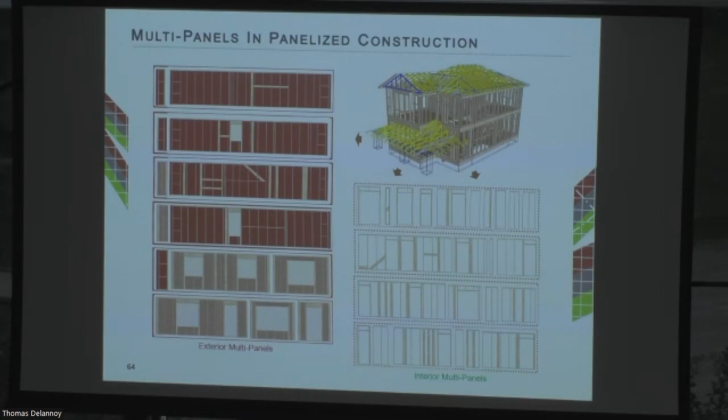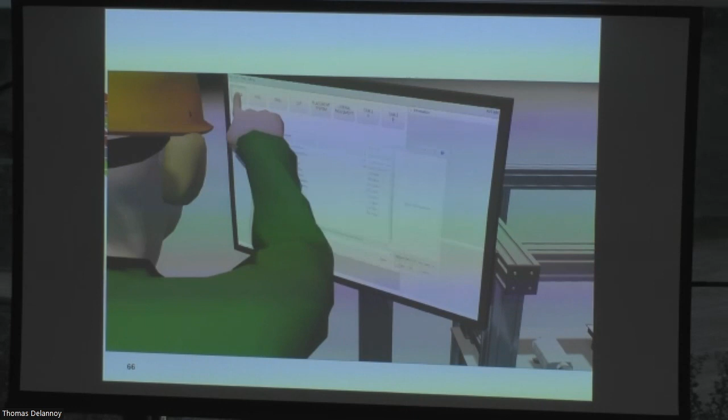What I discovered also is the industry in North America needs a little bit of automation. I know construction doesn't like automation, they get scared, the same way we all get scared from the dog walking around us here. So the industry has gotten scared of automation. I started to build my own machines for framing, this is for wood framing. These machines are fully automated, in a way—not fully, I mean with the human in mind. You have an interaction with the human.

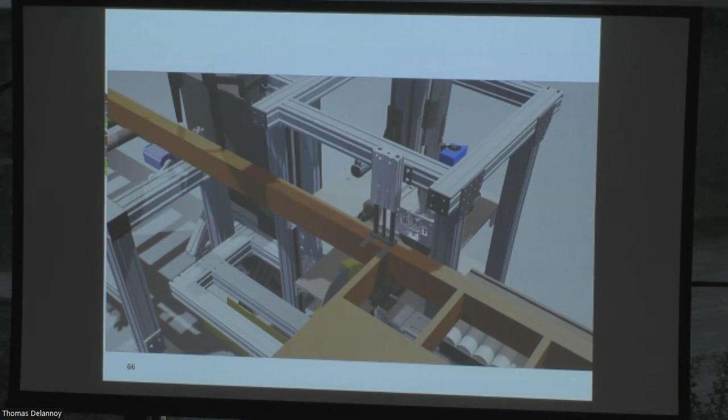I build all the walls in a 2-story house, interior and exterior, between 60 to 90 minutes. The material comes to you, and the human just puts it in place, and the rest is done by the machine. These machines are fully developed, and I'll put them on the market hopefully this summer. I was supposed to do that a couple of years ago, but COVID happened, and then I opened the precast factory, so I spent more time on that and put this on the shelf.

I also built one for light gauge steel, which is popular in multi-story buildings, office buildings, and commercial buildings, where we use steel rather than wood. I built a similar machine to do that kind of operation to frame the walls. This was built in one location in the lab, and now I've moved it to where my precast company is. This machine is really ready to go for the market.

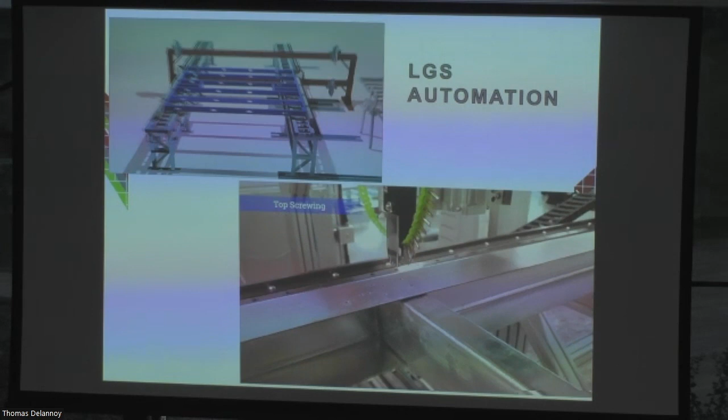This shows the machine and the way it operates. It was developed primarily by students. I hire co-op students from high school and university, supervised by master's and PhD students. They design it, they buy the parts, and they build it for me, and we test it all the time with the students.

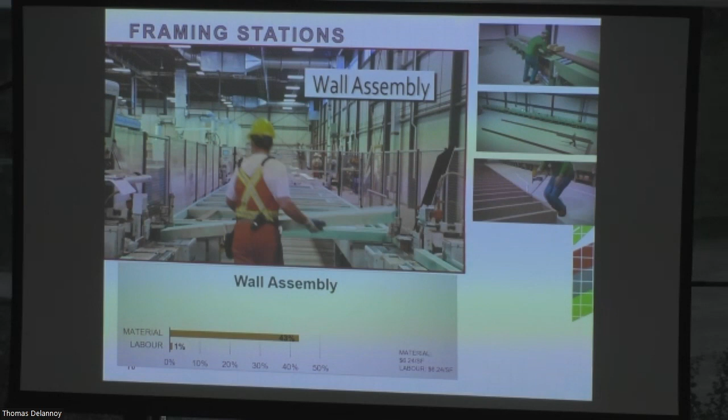For the wood framing, if you look at the human here, he works in a very small area—his motions are within a meter and a half max, picking up something, dropping it, picking up something and dropping it. That's what I mean, you can build a house in 60 to 90 minutes based on the size of the house. Here you can see lots of interaction between the human and the machine. There are other machines where you have way more machine work than human, and other places where you have 100% human.

In this case, for windows, I budget 6 minutes for installation. Every window must be installed in 6 minutes, with 2 people: one carries it using the vacuum system and puts it in place, and the other finishes it up, and so on. So there's a lot of efficiency you can gain in place.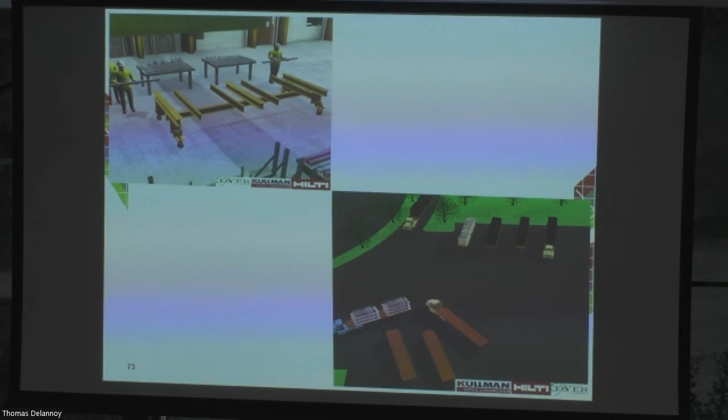The other project which came up as needed is mechanical systems in hospitals. In this project, we put all the mechanical systems in the corridor and branch them out into the rooms, the patient rooms. These modules, shown on the top left, are built in stations of 2 hours—every 2 hours they have to move, across 3 stations.

But what's demanded is everything must be ready for that person to put it together. Nobody's making anything here, it's only an assembly station. And we start to look at on-site, the same thing. I have people fixed in one location, modules come to them, and then they have to do certain operations and wait for the next load of the next module to come.

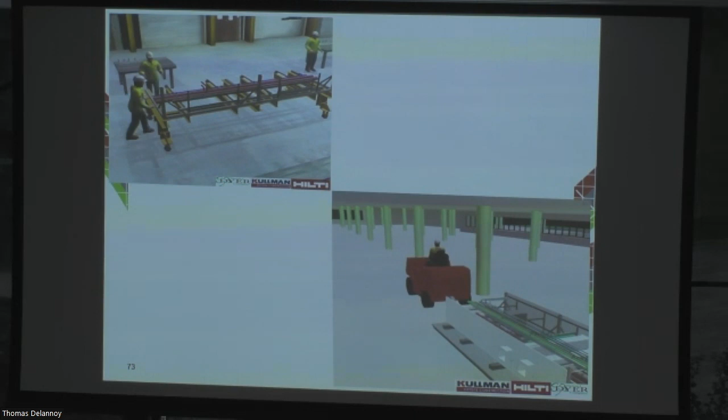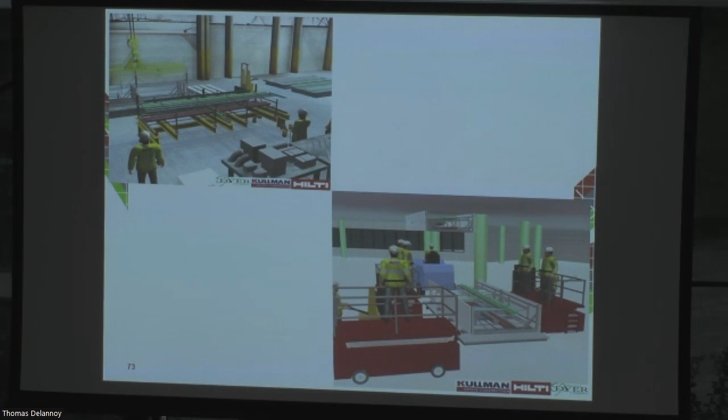So these people are sitting and standing, because at the time they will give me three floors at a time. So when they build three floors, my modules will be ready, staged in a location, and then they move in to start putting them on the three floors per the schedule they give me. We come up with systems to hang it from a distance because I can't slide it in, but we have a platform extended a little bit to the outside, so I can slide it in. Lots of technologies we use from other industries, adapted, and so on and so forth.

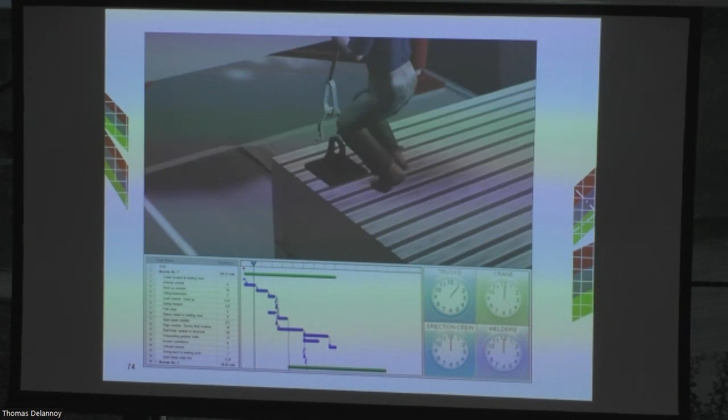So this is basically what this project is all about, mechanical systems. And the last one is just to show you, this is a 34-story building in Brooklyn, New York, which had the same challenges as Hong Kong. I had to find a staging area. If you look at these people, they sit in one location. Every person is accounted for based on what they do, what kind of operation they need to do, and when they do it, based on a schedule, because these people will be doing something, sit down, and not go anywhere. Stay where you are, the next module will come to you.

With this, Professor Lafarge, I've done my presentation.

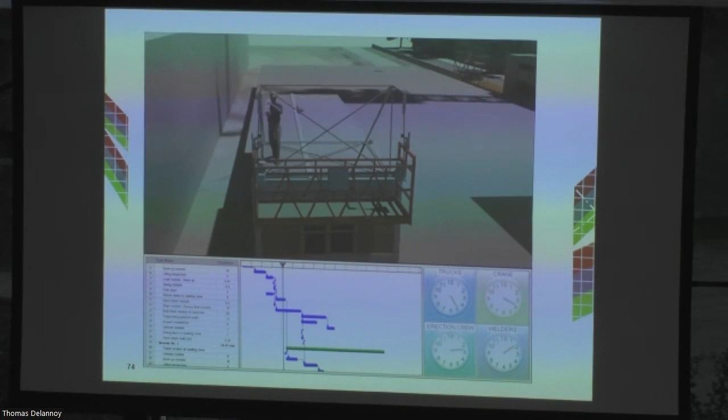Thank you so much, Professor Mohammed. We have a couple of questions, please, and then we will move to a round table. My question is about the storage zone—is it based on the size of the building, or how do you do it if it's a small plot?

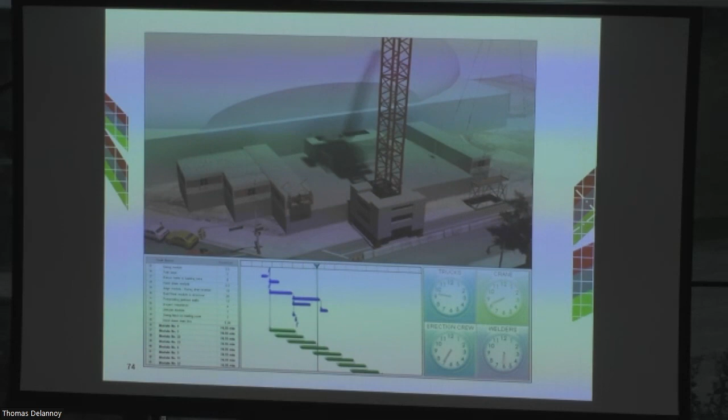This one here, the one you see in Brooklyn, was probably the busiest street in Brooklyn. There's no way I can block the street for an extended period of time. So we found a parking lot nearby. We store our modules there, and then we transport them one by one. If you can see here, the animation shows how busy the street is based on information we receive from cameras. It tells you how busy the street is.

So I have really zero place, so I have a challenge. It's a challenge which Dr. Zaid mentioned earlier on—to find a location for your modules, you have to plan way more than regular construction, really.